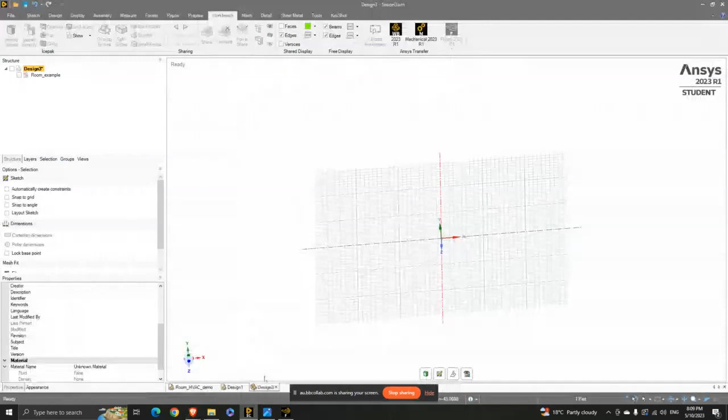So you should see my screen now, and this is the image we saw in the first slide. This is the image of the apartment, and I use the software called SpaceClaim, which you can just start from ANSYS. Just type SpaceClaim, and it will show up here, and you click on it, and it will open up this design mode. I already have this room example included, but I'll show you how you can quickly bring that in. You just have that room example as a JPG file, and then you can just drag it in here. And when you drag it in, you can choose the location where you can set it. And you can click on this icon to view it in the normal mode.

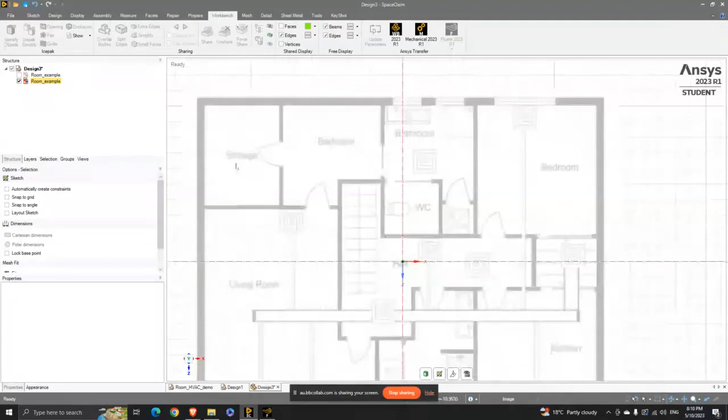So you can rotate it around, for example like this, so that I can see this is the outline. So now my task is to create a 3D model out of it. I can use the sketch mode to start tracing these dimensions. So first thing, let me just draw this line. If I select this line, I'll hide this. So if I draw this line once again, it'll actually tell me the value of that line. The other way is to look at dimensions and create a dimension like this.

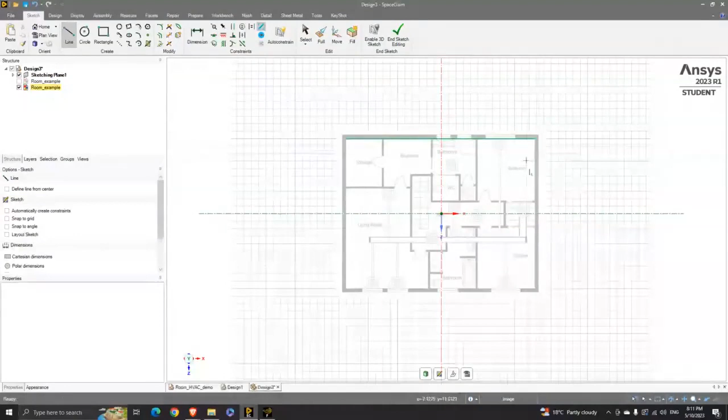So now it's saying it's 12.19 millimeters. Obviously our apartment is much more than that. So I will go back, and I need to scale this up to realistic proportion. I'll just do the same thing, but I'll select the length of the room and again set a dimension. So now it's saying this is 25 millimeters. So what I can do is scale this up to be about 5 meters.

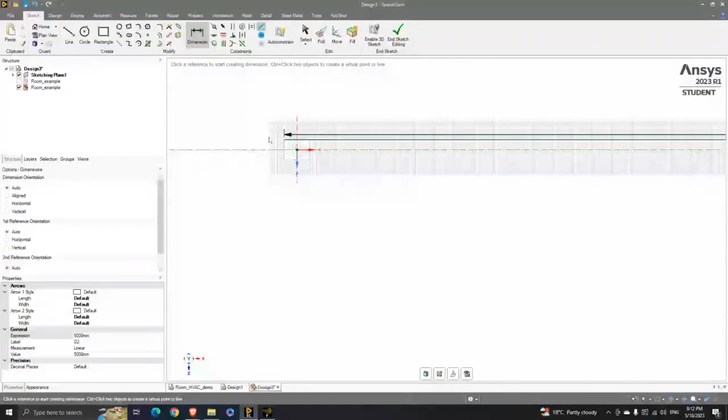5 meters. So just set this as 5,000 millimeters. If I hit enter, this will just become a very large line. And what I can then do is select this once I finish. So now I can scale this out.

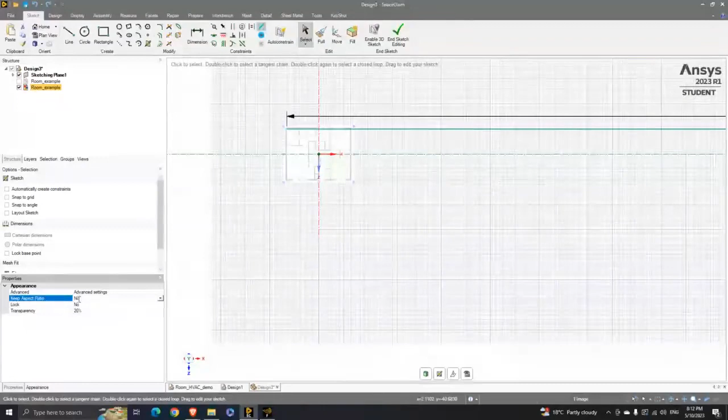Also, actually, when I scale it, there's this option to keep the aspect ratio locked, which means when I scale it, the aspect ratio on both sides will get locked. And I'll also set the transparency to 0 so that I can see this in more detail, and then zoom out and scale it such that I'm close to that value.

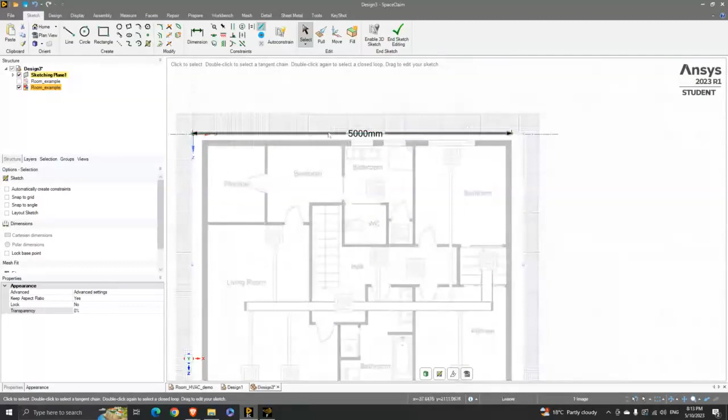Okay, let's just do that and scale it such that this is about 5 meters. So that's typical. Now I can start tracing across this plan. So let's just draw. So now that this is 5 meters, I can,

let's just make this transparency 30. If we have it as 0, we weren't able to see the trace that we did. So let's just draw like this, and then like this, and then close up the final one. So that's our outside walls represented.

Now we need to do the inside wall. Doing each of these will take some time, but I'll show you how you can do it. If you want to trace this wall, you can create a wall like this, create a wall like this. So these are doors.

Sorry, if you have any questions, I'm not able to look at them because I'm focusing on this. But if there are any questions, I'll answer them a bit later.

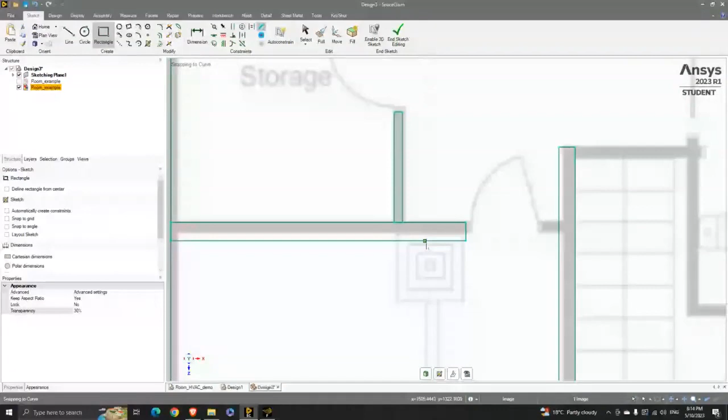So this is how you can create all the walls. I'll do a few and then show you. So these are some of the walls that we have created. In order to fine tune them, you need to zoom in like this, and there's a move tool which you can use to select this and move it up.

And now this has stuck out. There's an option to trim it away, and then you can make changes like this. Once you get the hang of it, these are just simple sketching tools that are available. So once you have completed tracing this outline, the next step is to go into the design mode and select the 3D mode.

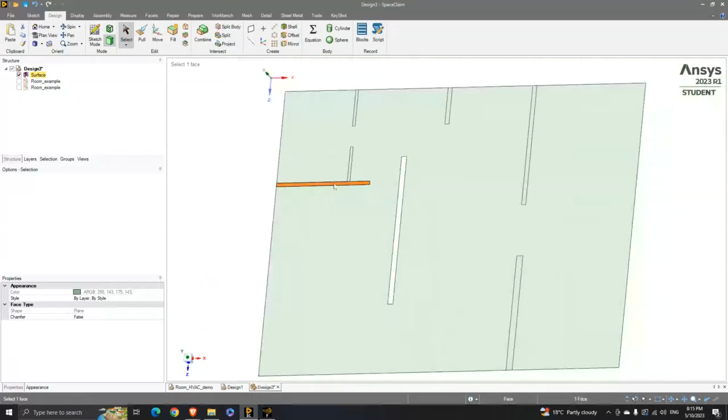Now I'll hide this, and then this is the base of the room, for example. These rectangles are actually walls. So we actually delete them because we are interested in only the fluid volume. The walls will actually be a negative, which we don't need. So this is, for example, the fluid volume.

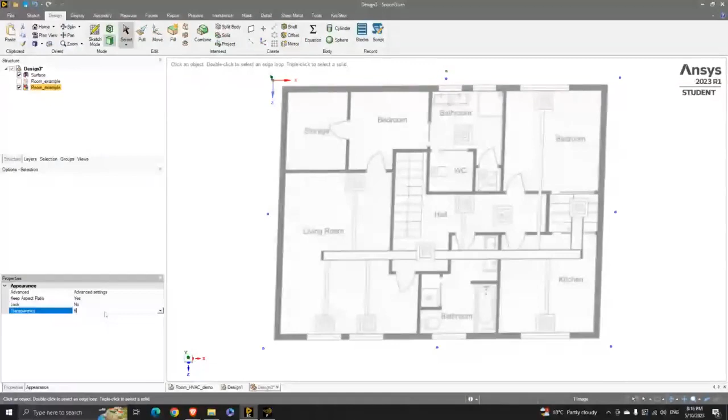So if I switch on the room again, and maybe this time I'll make the transparency about 60%, and then also I can select this. Yeah, so there we go. We can see it in a slightly better light. So this is how we are tracing the shape of the walls.

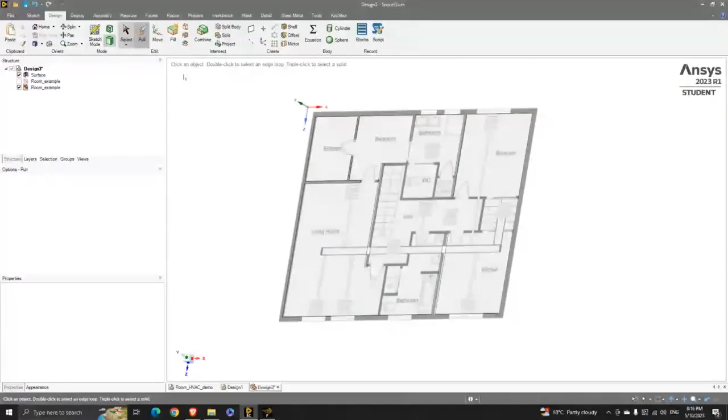Now to create a 3D volume out of it, you just simply select the surface and click pull, and you pull this up by say 3000 millimeters. That is about 3 meters, the typical height of a room. And if I click transparent, you can actually see through that.

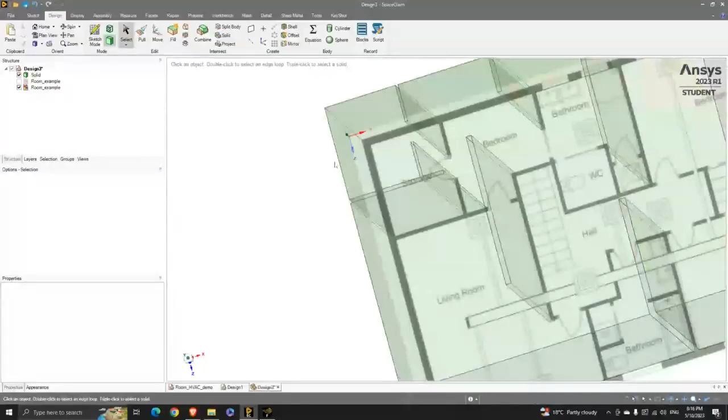So these are actually the walls, and obviously I've not finished everything, but for example, this storage is well defined. You have this wall and this wall that define the storage room, and similarly if I had drawn something here and here, that would define the bedroom, things like that. So that's how we generate the different compartments.

So now that we have this, I'll show you how we can create some heat sources. For example, in the kitchen, we would probably have a refrigerator. So again, I go to the bottom surface, the ground plane of this, and go to the sketch mode, and I can click.

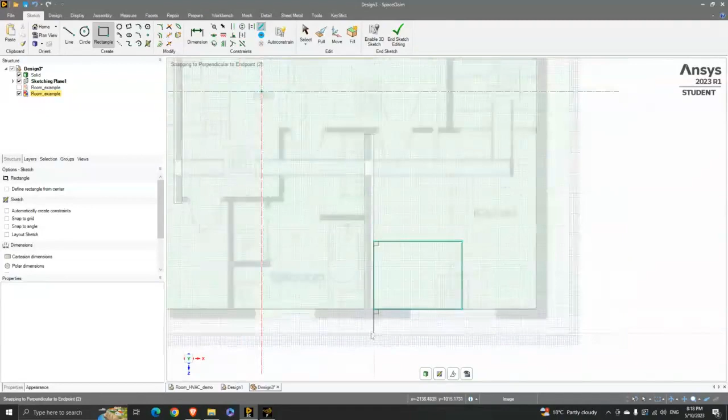So what I can do is select a rectangle and create a rectangle like this. Typically, the refrigerator would be about 600 mm deep and about 800 mm wide. So that's like a 500-liter refrigerator. Again, there might be a smaller dishwasher, for example. So that's about half a meter and then 300 mm deep. And then there would be maybe a microwave oven, which would again be around 250 deep and then 500. So things like that. You can create simple boxes.

Suppose you want a television in the living room. Maybe it's oriented this way. So let's say it's a big television, 55 inches. We can change it to meters, but let's say this is a meter long, and usually these televisions are thin these days, but let's say that's 50 or 100 mm thick. Okay, that's how you can create it, and maybe there's a desktop in the bedroom, and that's maybe about 500 millimeters long and 250 millimeters wide.

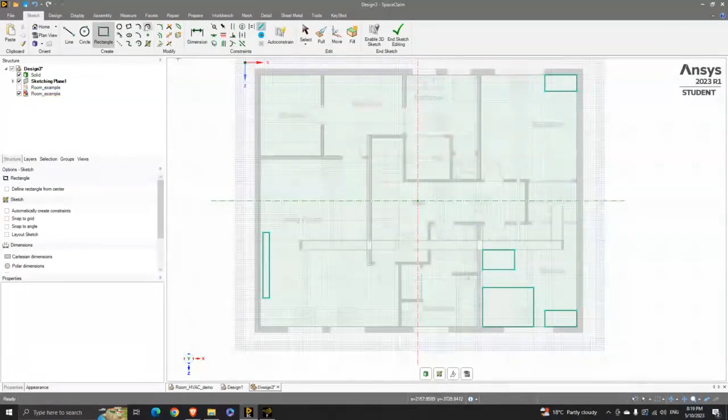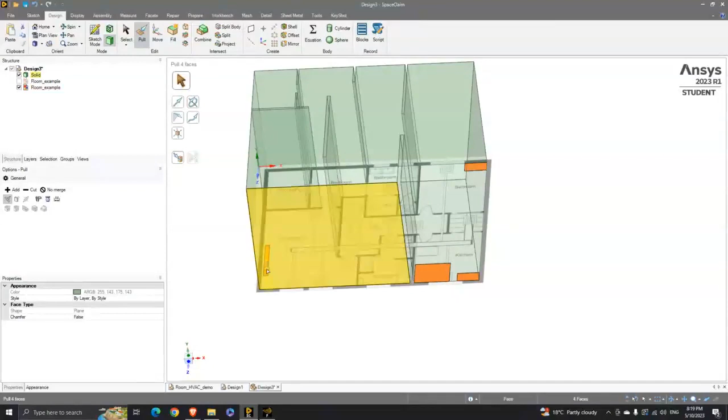So something like this. And if you go to the design mode again, you will see that it has created some surfaces here, here, here, and here. So what you can do is select pull and extrude them up. So you can say don't merge them with the underlying, no, control. Actually, what you need to do is make a copy of these surfaces and then pull them up.

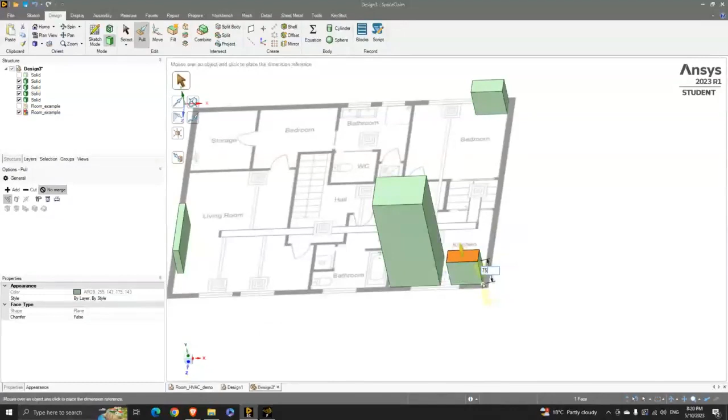You can resize each of them, for example, this you can resize to say 700. You can say this is about 800 or 1800 from the bottom, and this surface is about 750 from the bottom. Similarly, you can size all these. So this is your fluid, and then these are your heat sources.

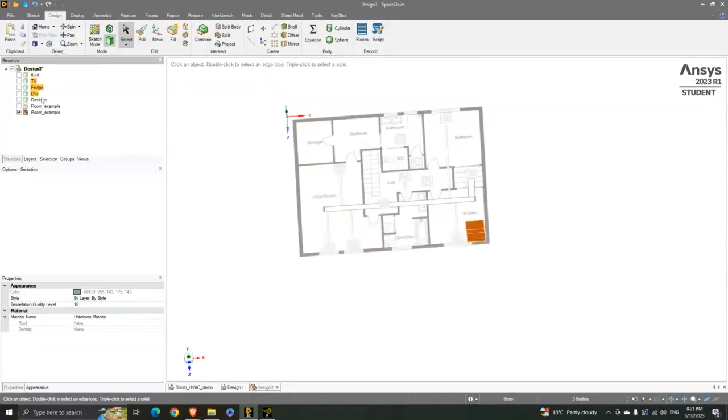So call this fridge, sorry, this would be the TV, and then this would be the fridge, this would be say dishwasher or something, and then this would be a desktop. You can do all this, and these will be the source terms. So now let's just change the color for these, and then desktop, go to display, and you can change the color to be violet, and then switch on everything. So we can see these surfaces.

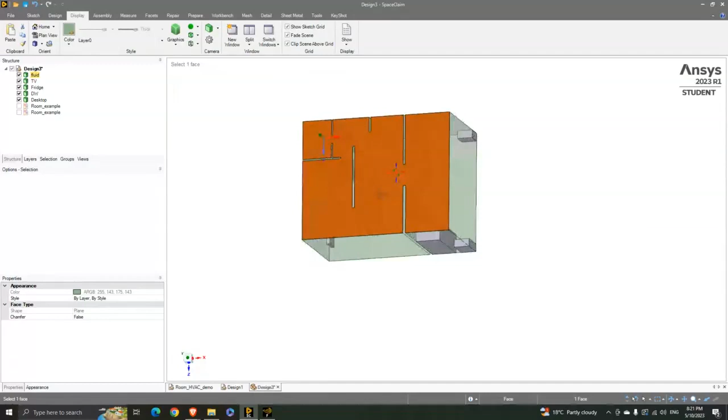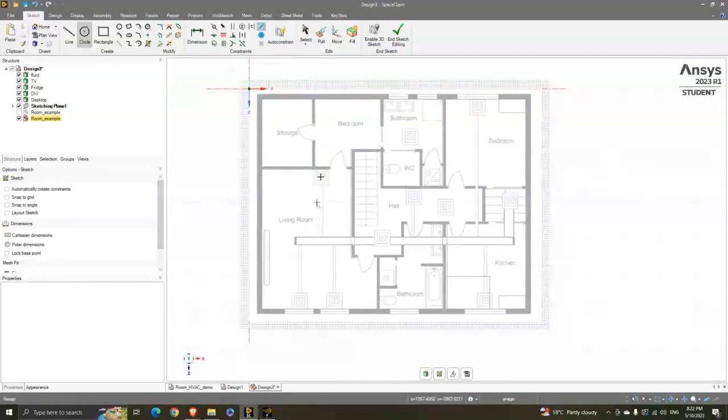Now the next step is to do inlets and outlets. I'll quickly show you how you can do that. Usually inlets and outlets are coming from the roof. So for example, if I switch on the room, and this time I'll make this zero transparency so that we can see them. You see these square sections, they are usually the inlets, but for the sake of simplicity, I'll assume they are circular inlets.

So I can select and set a circular inlet like this, and I'm using a random, so you can just select and then create. I think it's not showing me because of the transparency setting, but you just map these inlets like this, and outlets may be here. So if you go to the design mode again and hide this room example, you'll see that these have been created at the bottom.

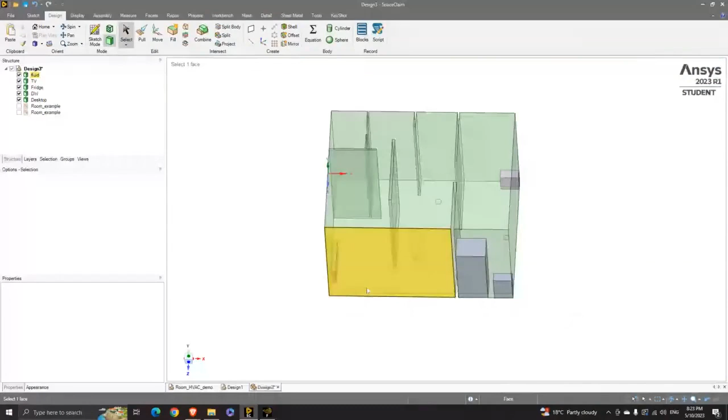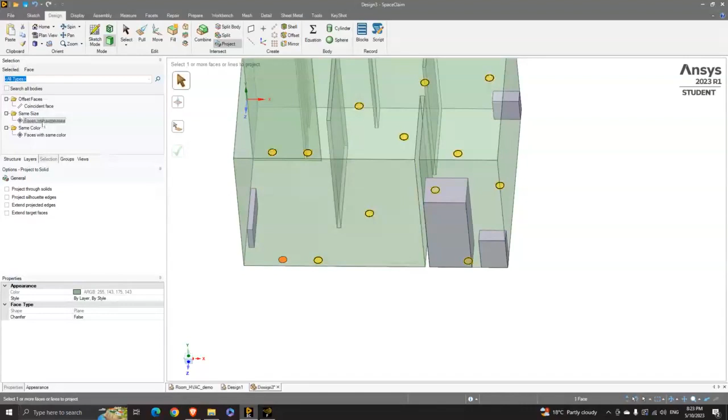There's an easy way to fix that. So select this, and you can go to selection, select the faces of the same area, and I can project these faces onto the surface. Select project and select the surface, and then done. And it has projected those inlets to the top. And now I can again select coincident faces, and then remove this, and it has selected all the faces of the same area.

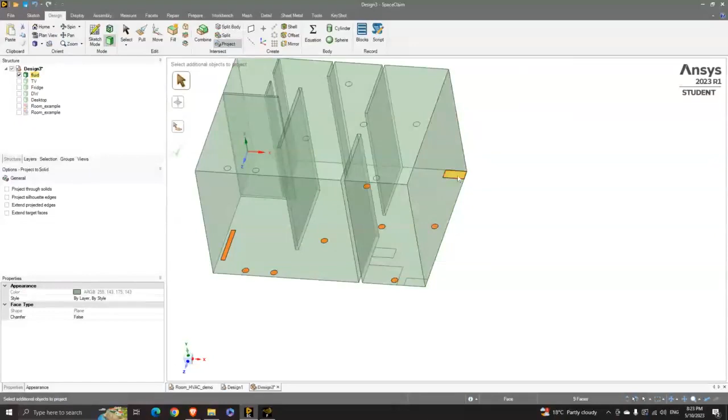Or I'll show you another way. So hide these, and I can do a box selection like this and hide these faces, and then click the fill option to delete them. So now I have my inlets. So again, go back here, faces with the same area, and use the pull option to create a duct through which the flow will come. Okay, so that's the inlet duct.

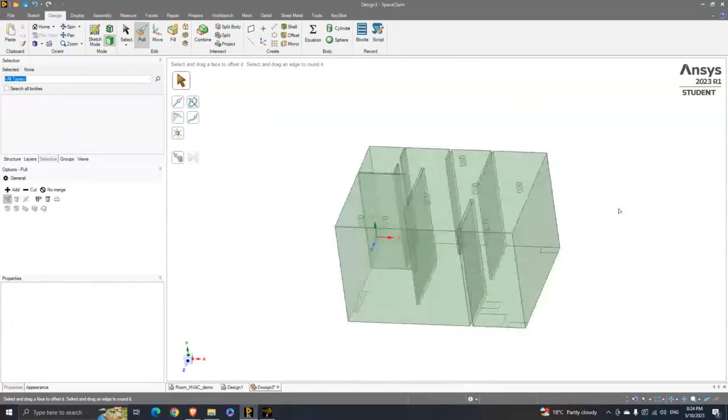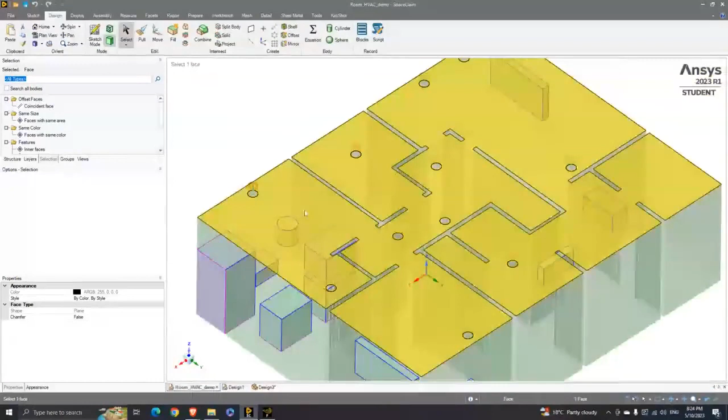So this is how you can refine this further, and this is how the refined example would look. I had a few more heat sources, and these are my inlets. I assumed that they are an annulus, so it's actually coming from this ring rather than the whole surface. And these are my outlets. So the outlets are not a ring, but they are these surfaces.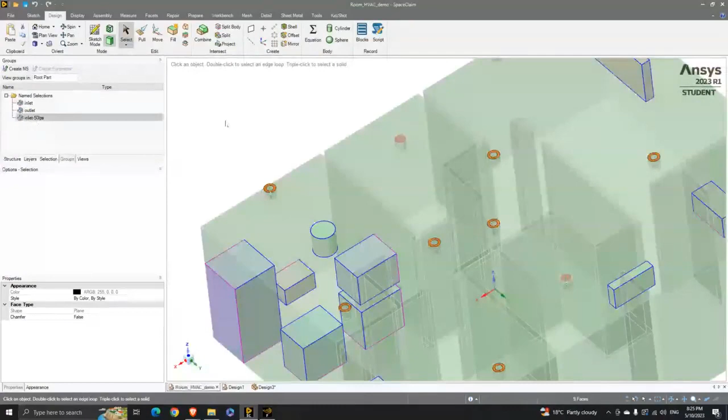So the flow comes in from these inlets, which I'm highlighting here, and then this outlet is where the flow is going out. I'll try to share this geometry with you. Another thing to remember is the fluid and the solid should be either coincident, or there should be enough gap between them so that you can create cells in between. That's critical, otherwise you'll run into trouble with poor quality elements. So once we have this, I'll just show you another thing to check.

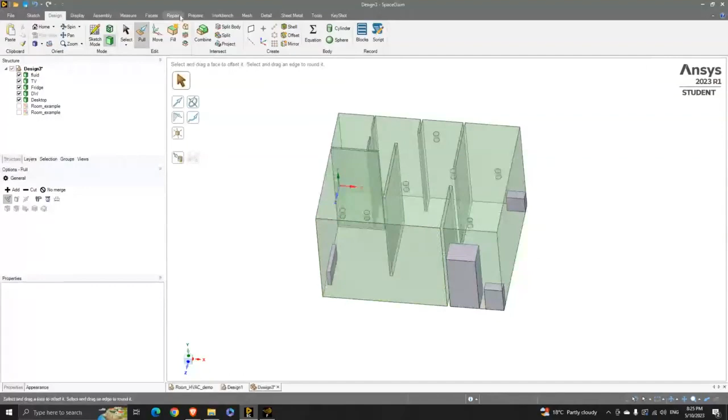And what we need to do is we need to use what is called share topology. What that is doing is it is identifying which regions of these bodies touch, and then it is going to map them for meshing purposes. So this is an important step.

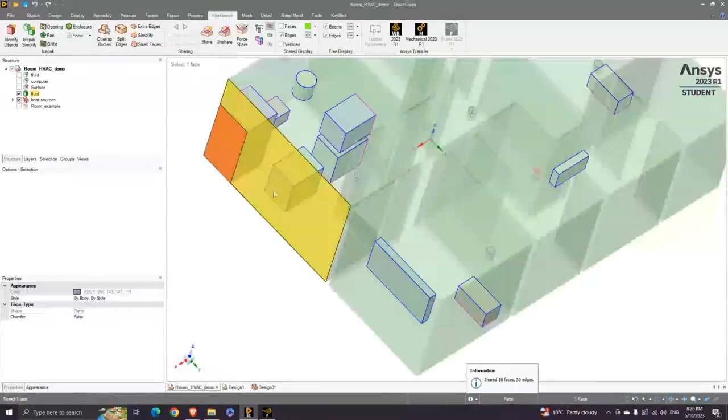Click on share topology, and then you see this color which is similar to the color we have here. That is basically telling that, for example here, there's a face here which is connected to this surface and this surface, and same thing at the bottom. So this face and this face, there's appropriate connection between them.

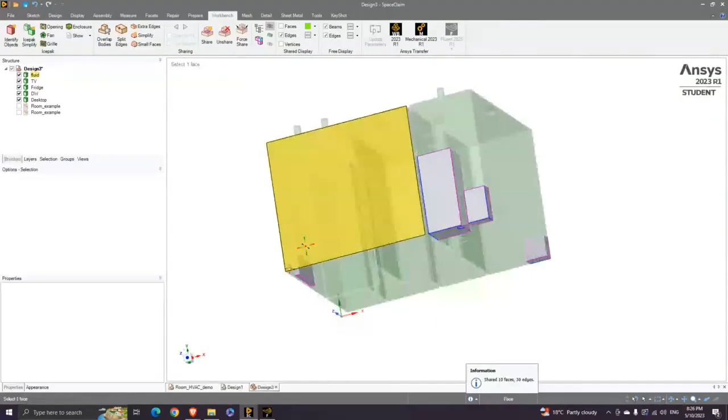So once that is done, next step is to do the mesh, and for that you actually click this button. Right now I've already clicked this, that's why this is gray. And if you click this button, there'll be an option called watertight geometry workflow. Let me just open Fluent in the background and see if it will show you.

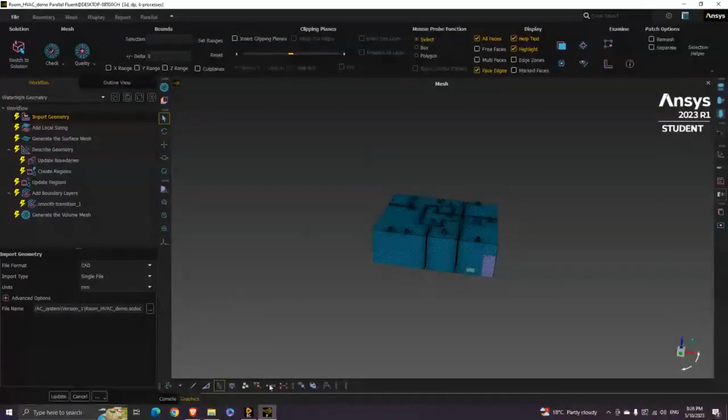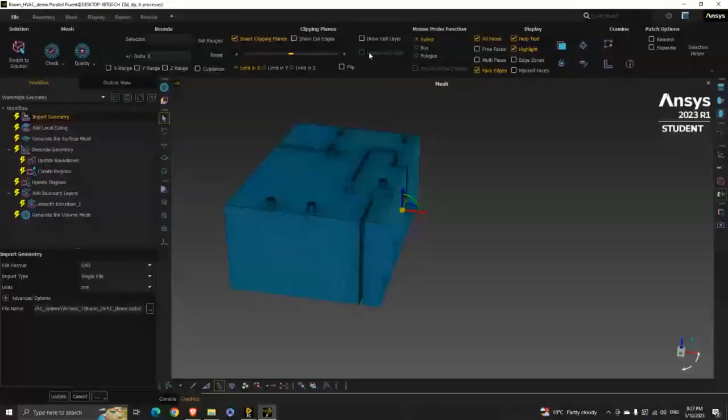But this is the Fluent meshing software which gets opened when we click on this button. And here this is the workflow that is present. So let me see if I can show you. Yeah, so in here, there's this watertight geometry workflow. If you click on that, it will launch Fluent like this with this workflow, where if you clear all these steps, you'll have a nice volume mesh like this. Okay, so I'll show you how we can do that step by step.

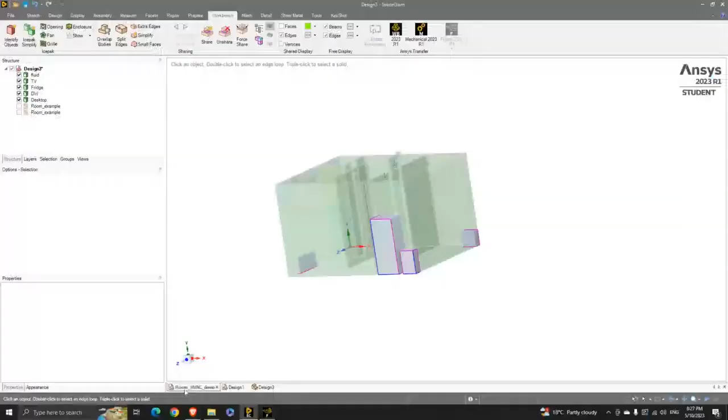So first step is to import the geometry. It already remembers the geometry that I have created, and then you can change the units if you want. I'll leave it as millimeters. So I'll click update. So what will happen is I have this room HVAC demo, which I showed you, that will come through into the software.

Now, next step is an option to add local sizing. So in real, what you would do is you would want to limit the growth of cells in certain regions. Right now I don't add it, but that's because I already have constraints with the mesh. So I'll just skip this. I'll just say I don't want to add any local sizings and click update.

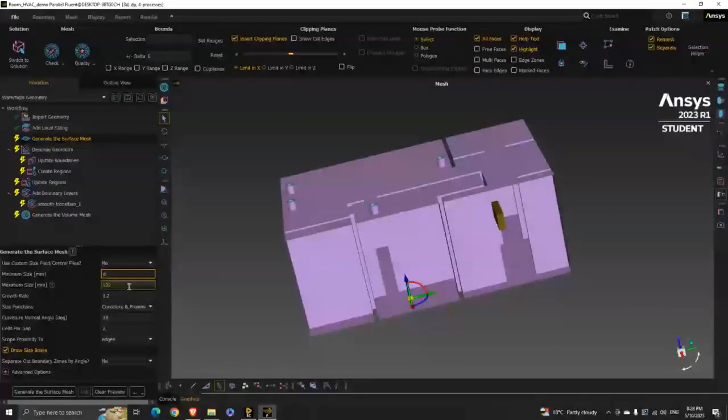Next step is to generate the surface mesh. So what you have to tell it is the smallest and the largest size possible. And the requirement for smallest size is the smallest size element should resolve the smallest feature of this geometry. So it could either be this thickness of the wall or this inlet section.

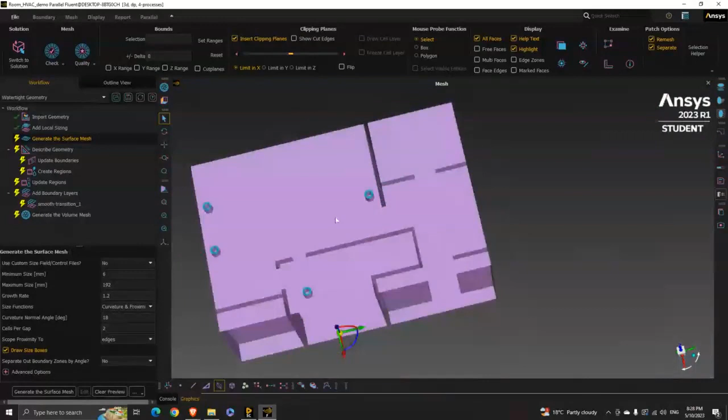So right now I have set this as 6 millimeters, and then the maximum size is the biggest size that will get generated, which is 192 millimeters. So that's about 20 centimeters, and this is 0.6 centimeters. Okay, and for now you can leave these as defaults.

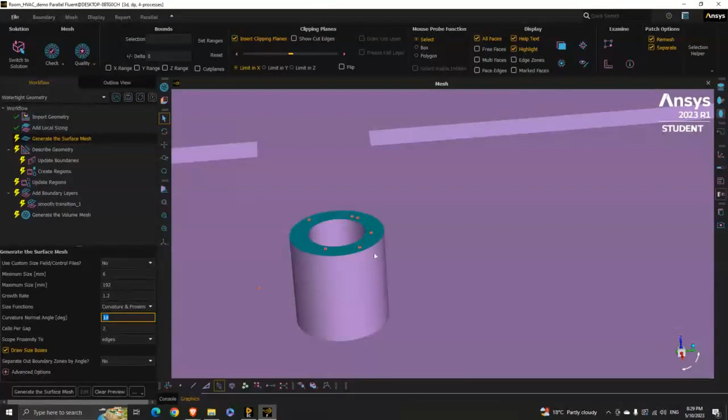So this curvature, what it would do is when you have a curved surface, it will refine that curve. It will ensure that there is enough resolution of the mesh in that, and the cells per gap will actually resolve this thin region, this wall thickness. It will resolve that properly. I don't have enough time to explain this in detail, but if you click on this question mark, it will take you to the help where it will explain this in more detail. There's a help manual which you can use.

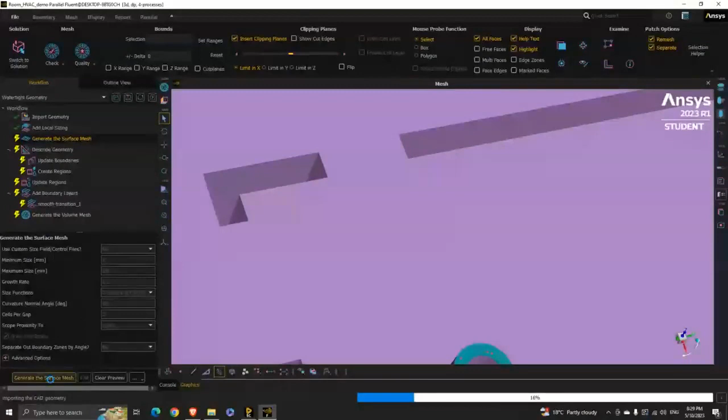So click on generate surface mesh, and that's the surface mesh it has created. And then I can inspect this by different planes. So this is the plane that I have generated. So you can see there are 2 cells here, and let's just hide this, and this is the curved section.

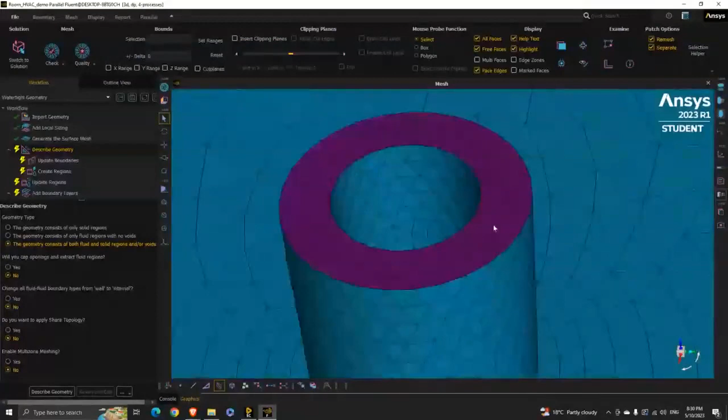Okay. Next step is to explain to this mesher what kind of a geometry you're providing. So this is like a multiple choice question, only one correct answer. So in our case, we have fluid and also these heat producing sources like a refrigerator. We assume they are solids, and so we use the third option.

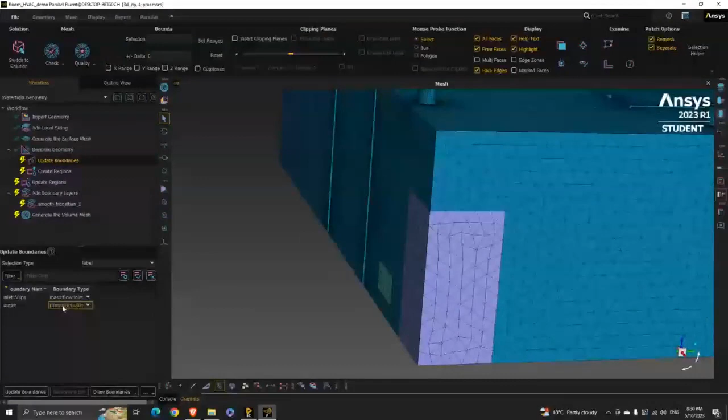You can go through this question mark and it'll give a quick help. And in this case, the answer is no for all these. So I'll click describe geometry. And then I have this update boundaries where I have to specify the inlet and the outlet boundary type.

So one thing I forgot to mention is when you're doing the geometry, for example here, the way to select these as inlets is to, for example, select a few surfaces and go to groups and click create NS and call this inlet, and then you can select this and select this and call this outlet. Okay, so what you're saying is these are the four faces through which flow comes in, and these are the two faces through which the flow goes out.

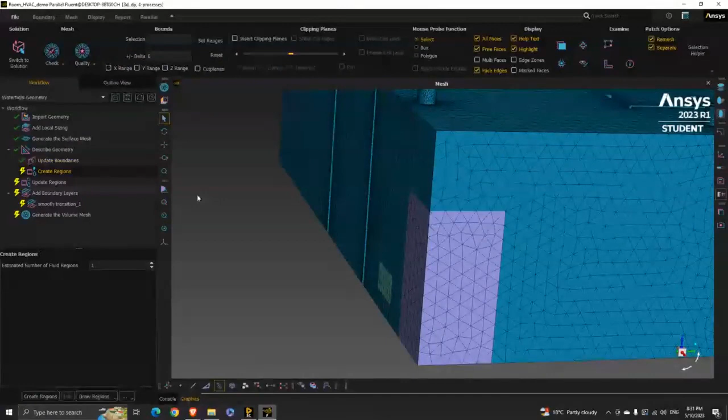And that's what I've specified, and I have a mass flow inlet for the inlet and pressure outlet for the outlet, and click update boundaries, and then I have only one fluid region here. So I specify it's just one region and click create regions. Then I have update regions. So it found this closed volume which is called fluid. You can see that is highlighted in green.

Then I have each of these. So this is a TV, there's another TV, there's a blender, a desktop, dishwasher, dryer, other things, washing machine, things like that. So I've given like temporary tentative wattage so that I can easily set them when I'm setting up my Fluent simulation. So I'll click update regions, and these are all solids.

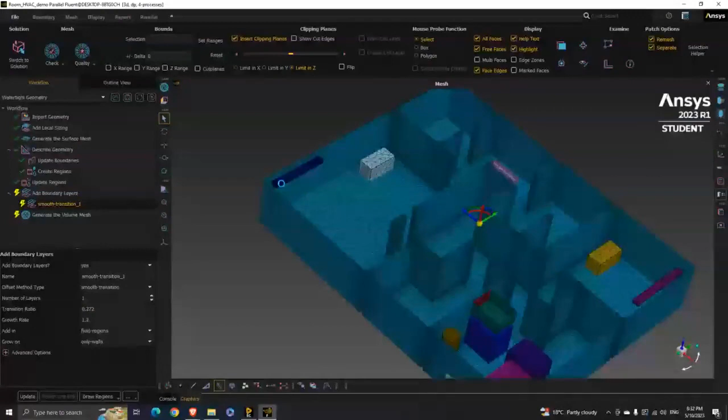And then next step is to add a boundary layer. So right now I've just added one. Recommended is 5 or 6. But another step is when it generates the surface mesh, just have a look at the face count. I'm using ANSYS student version, which limits the mesh to about 500,000 cells. So if you have anything above 100,000, you can't add more than one layer. That's why I have just one layer, and I'll click update, and then next step is to generate the volume mesh.

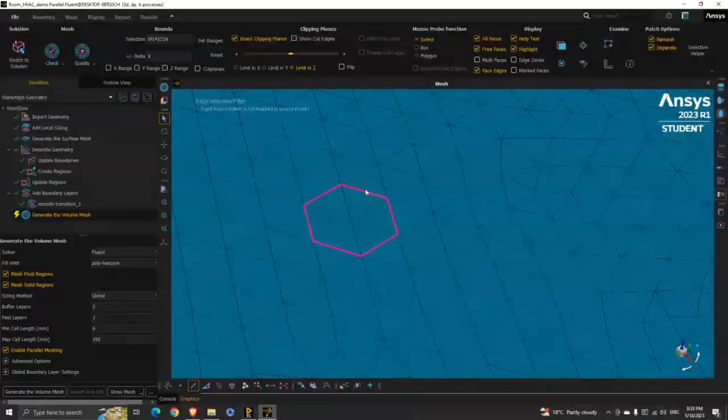So I use this method called poly-hexcore, which will combine a few triangles into a hexahedron. So if you see these triangles, let me just identify. So if I select this, this, this, in the mesh generation process, this will get combined into one hexahedron. Okay, so let's click generate the volume mesh.

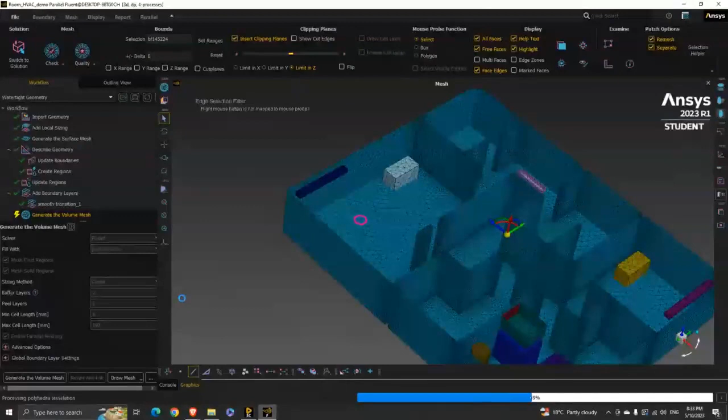So there we go. That's our mesh. And if you go to the console, it has done 464,000 elements. We can go up to 512,000, but I think okay, there was some error.

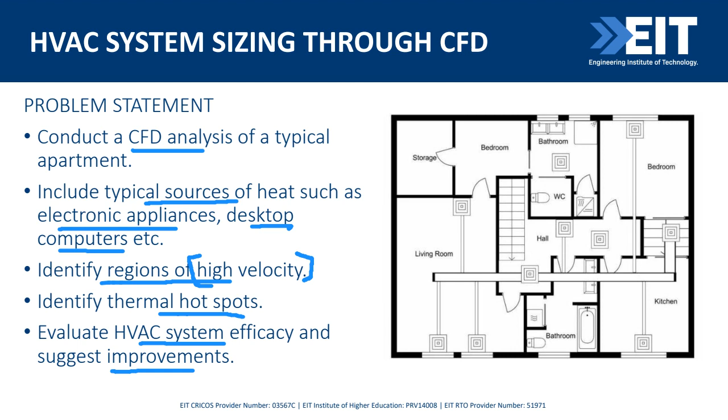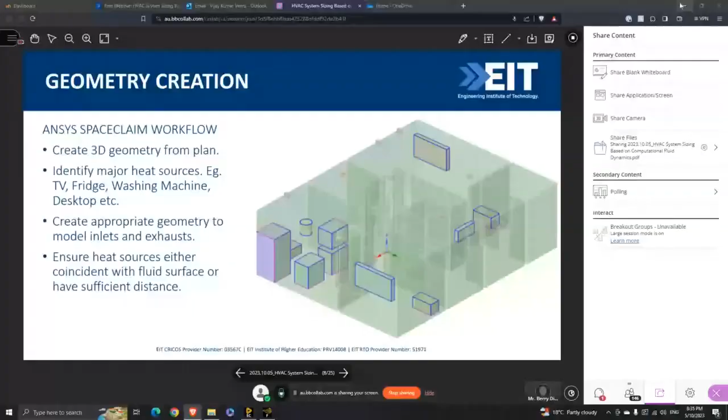Hi, Vijay. Hi, sorry, how long was it on for? Yes, it's uploaded now. Okay. Were you able to see whatever I was showing or no? Yes, I was able to. Then I'm sharing the other slide now, the initial one. Okay, thanks. But were you able to see my screen? Yes. Okay, thanks. Sorry about that. So can you see my screen? Maybe if you just message, or just speak, I'll know. Something's going on. Sorry. Yes, I can see your screen.

Okay. Thanks. So we just have to wait for this process to complete. But in the meantime, I have a mesh that I have already done, and I'll just load that up. So if I just open up Fluent, I can read a mesh file. So if I go to the working directory I have, that's my mesh that I created. So I'll click open. Use 4 processes.

I have 8 cores actually on my machine, but the student version will allow 4. You don't have to change these options. You just click start, and that will open this in the solution mode. I'll just check. Okay, it doesn't like the fact that I'm using this, so I'll stop this and close.

No. Okay. Are you still with me? Okay.

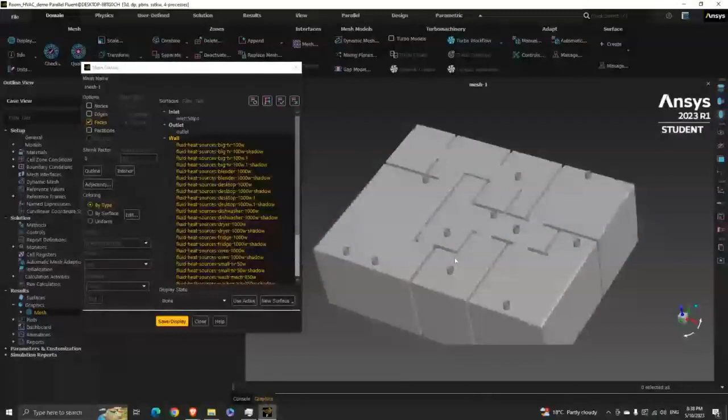So I like using this tab graphics console option where I can switch between the console, which is essentially the output of the solver, and then the graphics where I can see the model. So for that, what I'll do is I'll first create the outline. So I'll select the wall and then just show the faces. So that's my wall. Call this mesh faces.

Now, next up is to set up the models. So I already have a turbulence model called k-omega SST model, which is a good industry standard. We need to specify heat sources. So right now energy is turned off. But if we want to specify heat generated by our appliances, we have to switch on the energy equation.

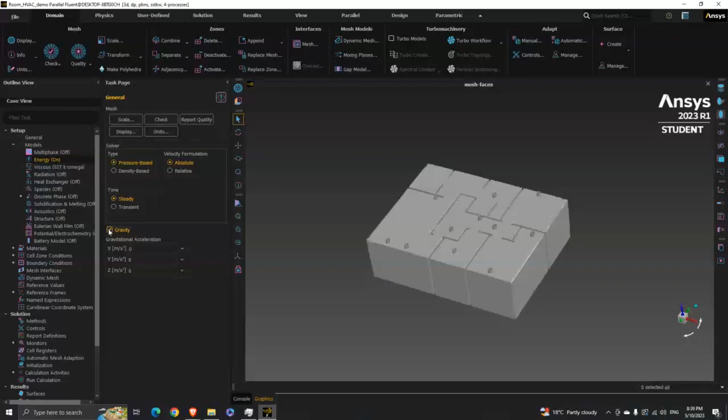I'll say okay. Another thing we need to switch on is gravity, because when you have heat supplied to air, that air will get hot and that hot air will rise because hot air is lighter than colder air, and you need to switch on gravity to capture that dynamic. And then you need to specify the correct direction the gravity is pointing in. So the gravity is pointing in minus z, so it's minus 9.81. You don't have to give the units. The units expected are over here. So that's my models done.

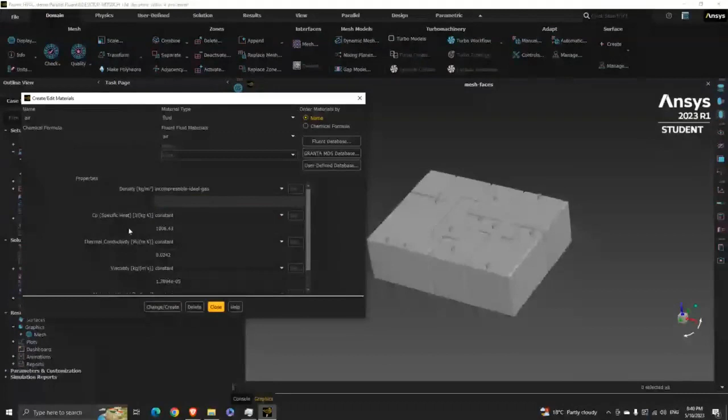Next step is to set up the materials. So air is the working fluid, we have air in the apartment, so that's the default. When you have heat, the density of air will change, and the best option for capturing that is this incompressible ideal gas. Okay, and you can leave these as constant and click change/create. So that's my materials done.

And the next step is the cell zone conditions. So this is where we need to specify some information. For example, let's look at this TV. So this is saying we assume this is generating 100 watts of power. So what we need to switch on is the source term, and then we specify an energy source. Okay, and then we set this to be a constant value. So here it's saying it wants information in watts per meter cube.

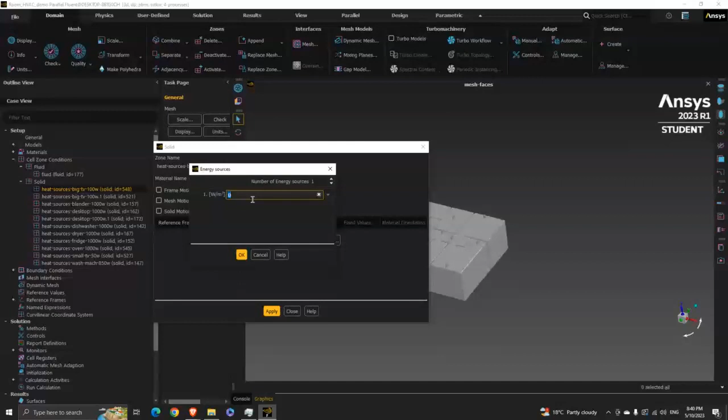So if I just give 100, it'll assume that it's 100 watts per meter cube that is being generated. So the best way to check this would be to create what is called an expression. So cancel this and right click on named expressions and click new. And this is called, let's say, TV source, and then 100 watts divided by the volume of the TV.

So if I go to functions, reduction, there will be a volume option, and then it's asking what's the location. So location would be, if you go to location, cell zones, there's this TV. Okay, and that's your value. It's 277 kg per meter per second cubed. I'll click OK for this, and then go back to the sources and set this to be 1. And here, instead of a constant, I'll select expression. And then it's saying enter expression, or in the drop down, you see this expression I created, TV source, it's picked that up.

So the key thing here is Fluent will only show the expressions which have the units that match. So suppose you have an expression for velocity, which is in meters per second, it won't show up in energy sources because the units don't match. So when you're creating expressions, you need to ensure you have the right units. So that's why I had this watts. If I just had it 100, then Fluent will give me an error because the units don't match.

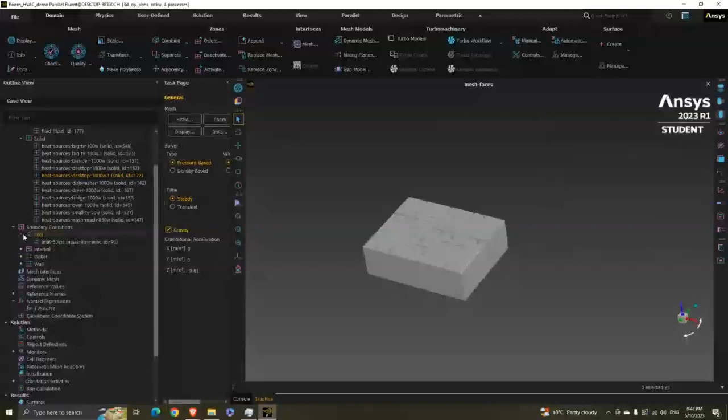Now you need to specify your cooling flow, so the air conditioned flow. So you have this inlet. Again, I have 50 LPS, which is short form for liters per second. So I need to convert that into a mass flow rate. To convert that into mass flow rate, I need to specify the temperature with which this cold air is coming. Right now this is in Kelvin. I can change the units to be Celsius.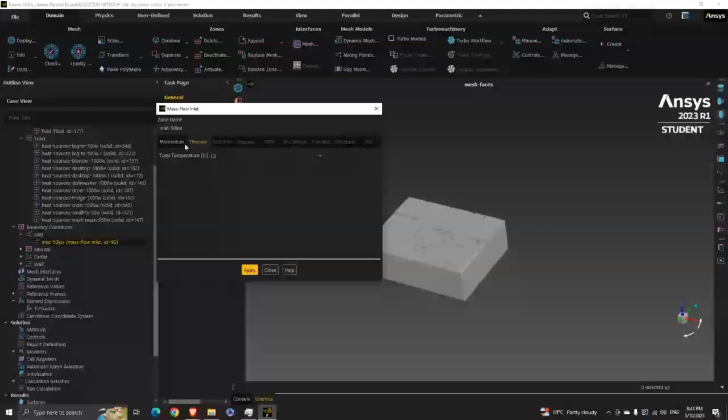So if I click on T, it'll take me to temperature. So I can change from Kelvin to Celsius. And now you see that the temperature has changed to Celsius. So set this as 13 degrees. Okay. So what I've done is I've set this to be 13 degrees. And now I need to specify the mass flow rate such that it is 50 liters per second. Again, I'll create a new expression and call this inlet mass flow.

Just check if I'm still here. Yeah, I'm still here.

And then, if I have 50 liters per second, that is 50 times 0.001 meter cube per second, right? So 1000 liters is 1 meter cube. So that's why I multiplied with that 0.001. So now we need to get kg per second, which is the mass flow rate. So to do that, we multiply with density, 1.225 kg per meter cube.

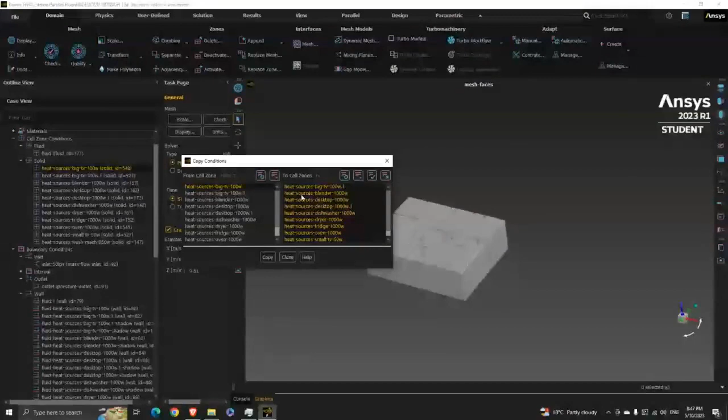Let's repeat the process. Click copy and then select. So here it will only find relevant solid cell zones. It will not show you any fluid cell zone. So click copy and say okay and close. And now you see the source term and you see that it has picked up that TV source even for this oven. So instead of doing it 4-5 times or 7-8 times here, I can use that copy.

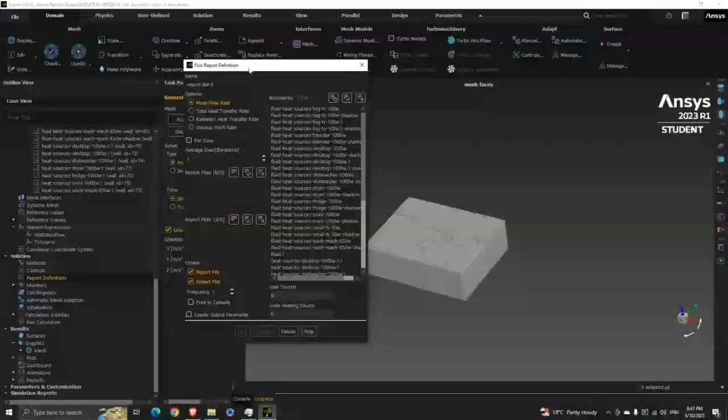So I think with this, I have most of my setup done. I can start running this simulation, but I'll do a couple of other things. First thing is I'll create a flux report of mass flow rate. And what this does is if I select all the boundaries, I can look at mass imbalance. So mass imbalance is basically the difference between the flow coming in from the inlets and going out of the outlets. There should be a balance for us to determine that the flow is converged.

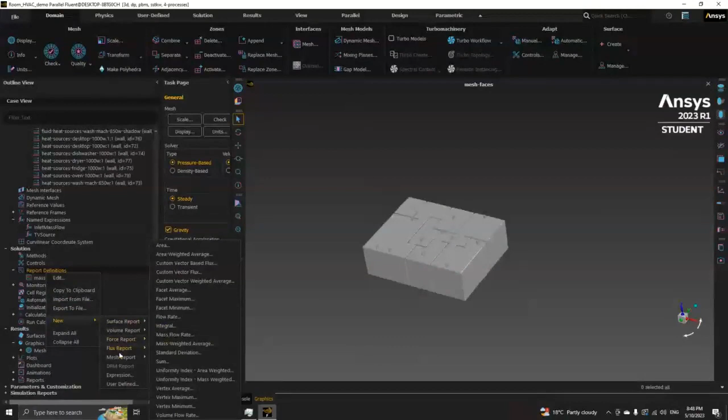So do the same thing where you go to flux report and this time heat transfer. So there's a lot of heat being generated or brought into the system. We need all of it to go out mostly to the outlets. So this is heat imbalance. Okay, click OK. So these two help us track the state of convergence, and then I think I'm good to go. So let me just save this.

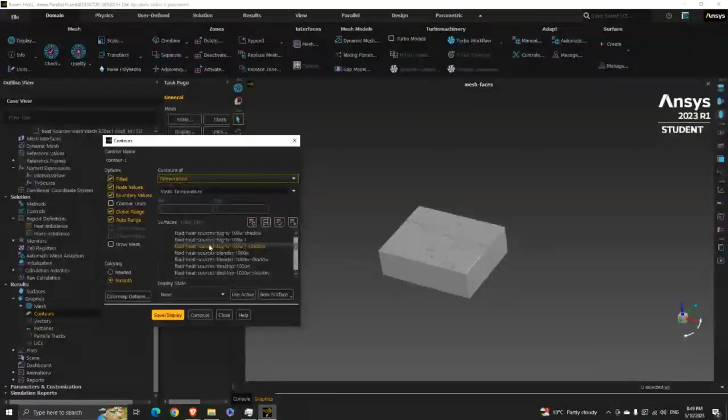Also, make sure you save this. So let's just create a new folder, version 2, and then just save it in there so that I don't overwrite what was there in the previous one. So once that is done, I will initialize, and you can use the default option to initialize, which is called the hybrid initialization. For example, let's just look at contours of temperature, let's say, on the walls. So that's our temperature contour where it's showing 13 degrees everywhere because that's the inlet condition.

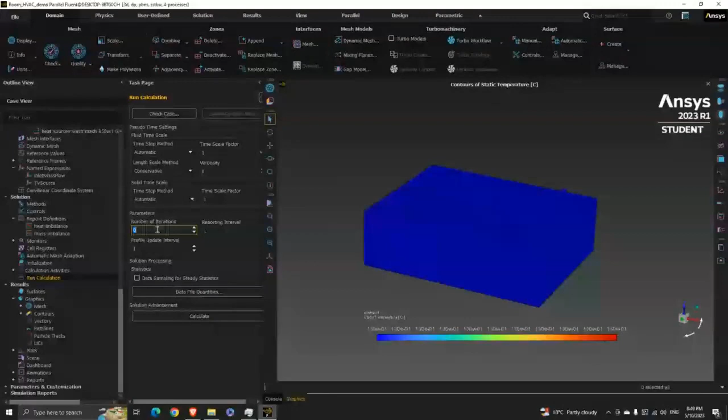But now let's run this for a little while. For now, you can use the default settings here where we use an automatic timescale factor. Sorry, you need to specify say 100 iterations and click calculate. So it'll start calculating and then it'll show you the residuals, the mass imbalance and heat imbalance. Let this run for a little while and I'll go back to the presentation.

So if I go to stop sharing and... Sorry, Mr. Berry, could you share the previous presentation slide once again? Yeah, sorry. One moment.

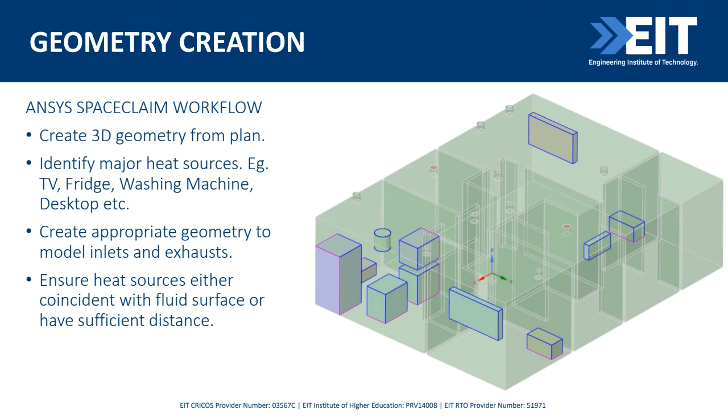So usually what you will see is, when you run this till convergence and look at the contours, you might see it's either too hot or too cold. If it's too hot, it means the flow rate is not enough to capture all the heat and take it away from the room. And if it's too cold, it means you're pushing too much cold air. So in the first scenario, you're going to be too hot, you are going to be sweating, and you need to have more capacity. And in the other case, if you're pushing so much more cold flow, you're wasting energy, because obviously using AC will cost a lot of energy.

So you're unnecessarily wasting a lot of energy, and you're in fact contributing to global warming, because even though you use an AC system to cool the air inside your apartment, overall, because it's not 100% efficient, it actually creates more heat in the process. Which means switching on the air conditioning is bad for the environment overall.

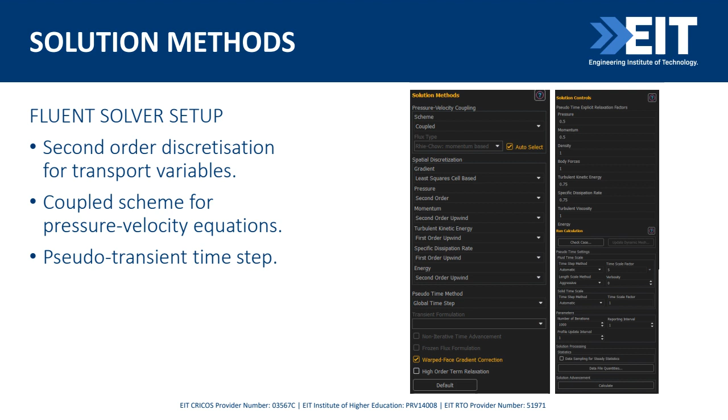So yeah, we've mostly covered all these, the watertight meshing workflow, the solver setup, and everything. So the final thing to check is how to look at the contours. So these were the solution monitors. I looked at the mass imbalance and the heat imbalance. And finally, you can go to the contours section and create some planes and visualize the flow patterns. So here is an example where I find these hotspots, regions where the velocity is higher, about 0.4, 0.5 meters per second. And these dark blue regions are where the flow is almost stagnant.

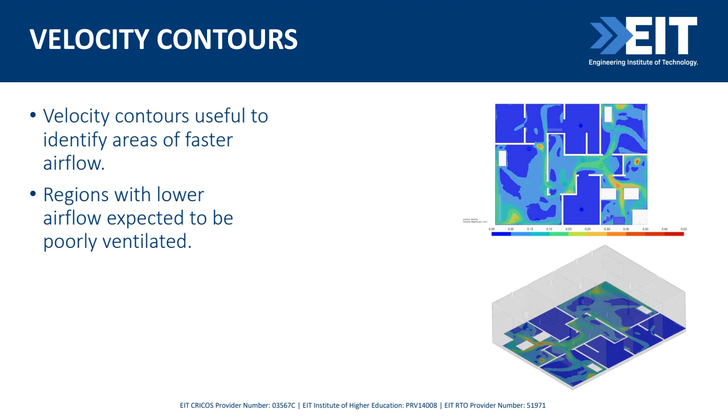So you don't want it to be completely stagnant, which means the air is not going from that room, and you don't want it to be red, which means there's a big draft that you feel when you're walking in that region. Okay, so you ideally want it to be light blue or green in this scale. So from 0 to 0.5, it should be either light blue or green. Maybe orange is okay, but if you start seeing more red, it means that's not the ideal place to be. The way to fix this is to look at different locations of the inlets to see if you can get this to be more uniform.

Next up is to look at the temperature contours. So here you see again 13 is your supply temperature. So blue is 13, and then 23 is the hottest you see. 23 degrees Celsius is not that bad, and that's because I did a couple of iterations to size this HVAC system. The first time you do it, you might find that you're seeing a lot of red or a lot of blue. So you have to tweak the flow rate or tweak the heat source information to get a result like this.

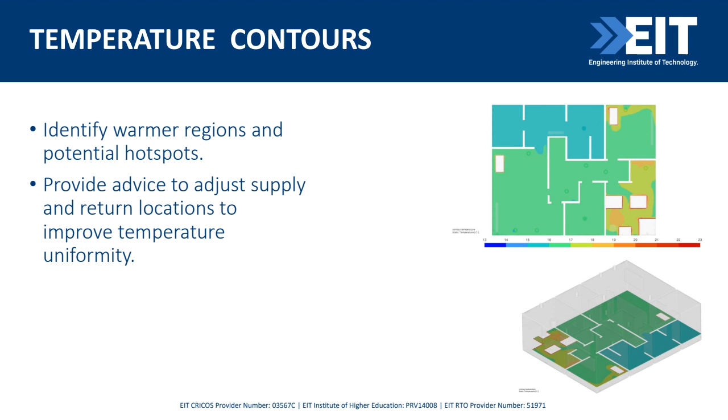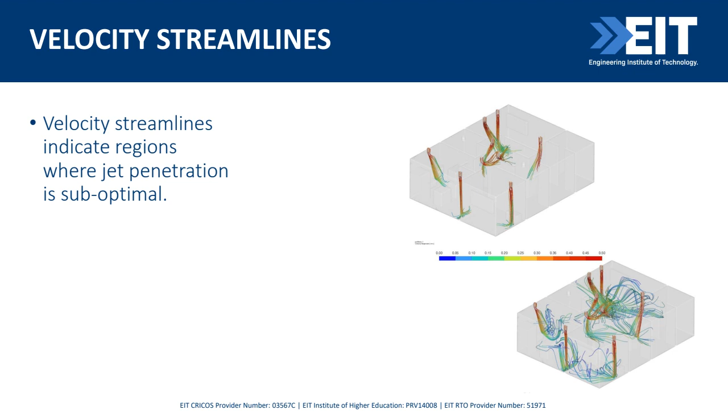Okay, and then we can also plot the velocity streamlines. If you see these jet streams going vertically down, it means that they are actually reaching the ground, where we are, whereas these are mixing with each other, and the streamlines are kind of chaotic. So we should ideally aim to have jets which are coming down and then spreading across. That will mean the most effective mixing between the hot air and the cold air. So we can visualize these things in CFD as well.

So I went through how to set up the problem, generate a geometry, generate a mesh, set up the simulation, and run it. I didn't show you how to post-process it, but if you look for post-processing ANSYS Fluent simulations online, you will find quite a few videos that explain this in a lot of detail.

The idea of using this software is to evaluate the efficacy of this HVAC system in ventilating the space. We saw which regions could have high velocities and which regions could have high temperatures. By understanding the flow patterns, you can come up with ideas to move around the inlets and outlets so that you have a more uniform velocity.

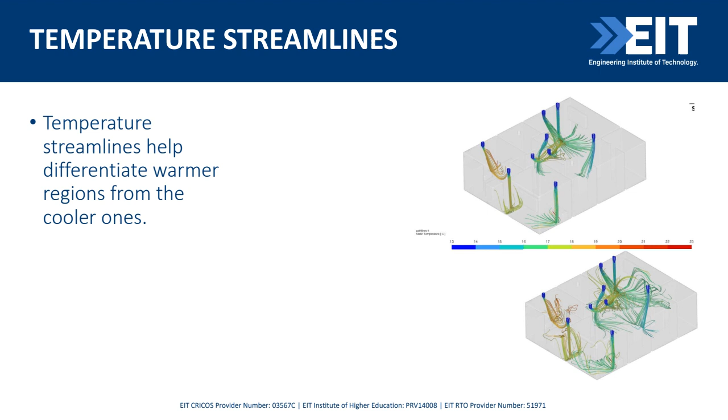Another suggestion that came to me after analyzing the flow field is to set an exhaust in the kitchen, because if I go back to the streamlines, you see this hot air actually going into other rooms from the kitchen. What if you had an exhaust there? All the hot air would just escape out from that exhaust instead of coming into the room. At 23 degrees it's not that bad, but if it was 45 degrees or so, you would be better placed to have an exhaust there.

The other advantage of CFD simulations is that they're more cost effective than experimental analysis. If you wanted to do an experimental analysis, you would have to create a scaled version of this model, maybe 1:10 scale, and then start introducing hot air and cold air. So CFD gives you a lot of advantage in time.

That's a good question, Dominic. How long will it take to mix the air? There's a formula to compute what is called the age of air. If you search online, you can find this formula and use it to get that answer. You can have a color contour with blue regions which indicate good mixing and red regions which indicate poor mixing.

And Kelvin, for your question, what resources do I recommend for heat source rating and flow rate? Best is to look at some examples of apartment HVAC systems. There might be some typical designs that are provided. But yeah, another nice place is the Professional Certificate in Heating, Ventilation, and Air Conditioning Systems.